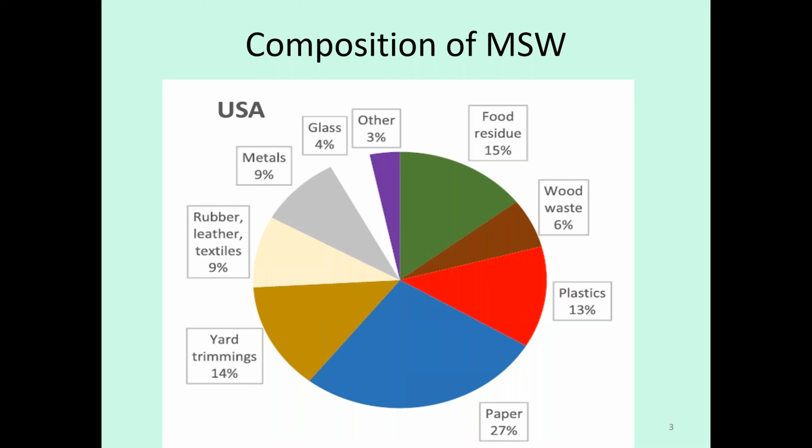Let us see the country-wise composition of waste for a few countries, including India. In the USA, the major portion is paper, which is biodegradable. Along with that, the second is yard trimming, food residue, plastics, rubber, leather waste. Wooden, metallic, glass, and other wastes are less than 10%.

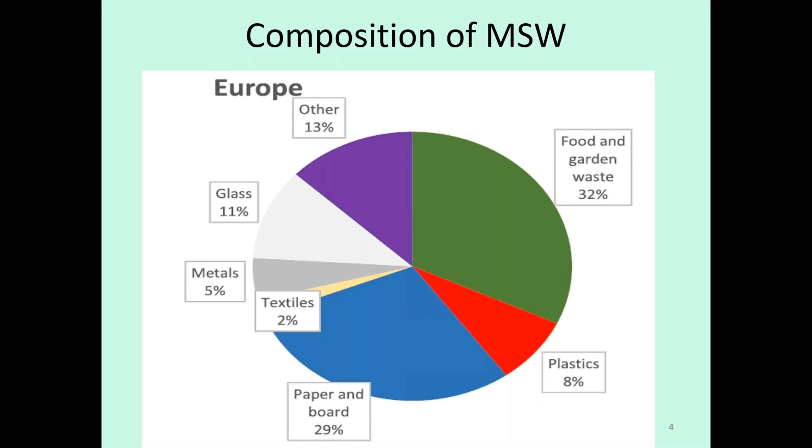Now coming to Europe, which is again a developed region. Their waste pattern is paper and board 29%. Food and garden waste has the highest percentage at 32%. Then glass, plastic, metals, textiles, and others.

Now coming to India. We generate 1.33 lakh metric ton of waste per day, out of which 0.91 lakh, meaning 68%, is collected, and waste littered is 32%, or 0.42 lakh metric ton per day.

The treatment as of now is: municipal solid waste treated is only 19%, whereas 49% is crude dumping, or landfilling. The type of waste we generate is 47% biodegradable, paper waste is 8%, rubber 9%, and there is a good amount of inerts which are non-biodegradable at 25%.

So India requires 1240 hectares of additional land per year to handle this untreated solid waste. Also, the calorific value of this waste varies from 800 to 1100 kilocalories, and the moisture content is 40 to 50%.

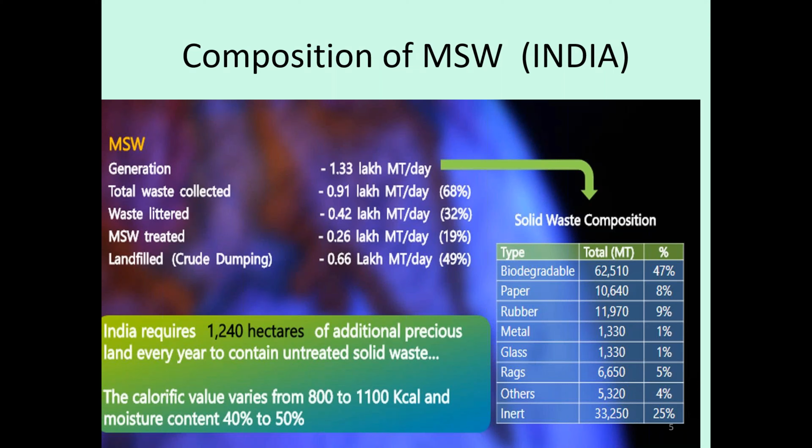Now, waste is not called waste these days, it is a wealth. As we have seen, there is a private company in California, San Francisco, who is managing a huge quantity of waste and generating a huge profit by recycling as well as by producing manure.

So India has potential by this year: waste to energy can produce 700 megawatts, and waste to compost can produce 54 lakh metric ton.

This report is from the Task Force on Waste to Energy constituted under the chairmanship of Dr. K. Kasturi Rangan. I have taken the data from that.

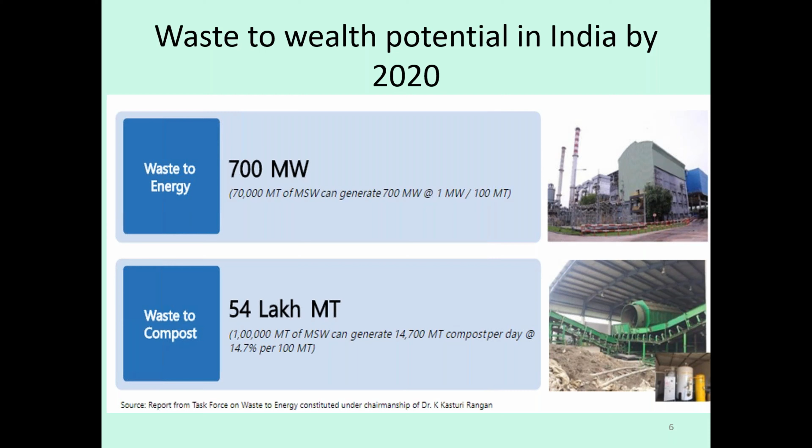Now, how to manage the waste? There are mainly three ways. First is recycling. That is the best method if we can do this. We have seen that San Francisco is recycling 76% of its waste.

Second part is energy recovery. If we cannot recycle the waste, we must recover the energy from it. My today's presentation is based on this second part of managing waste. And obviously the last one is landfilling, which is the least preferred and is often avoided.

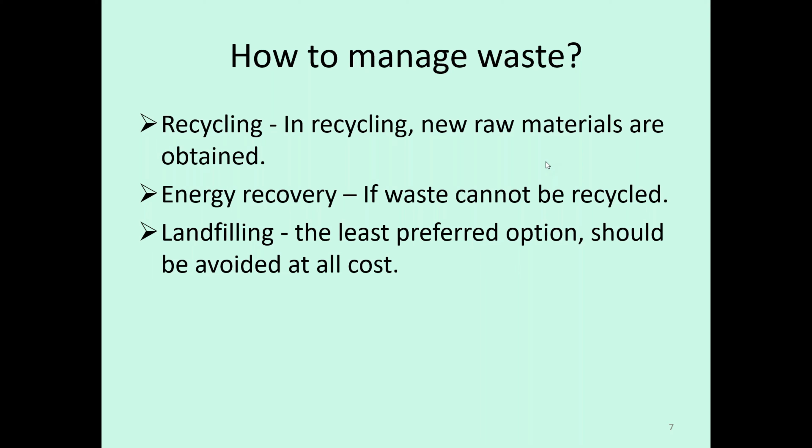So before coming to my topic, which is pyrolysis, let me introduce another common terminology, which is incineration, or simply burning.

Most countries right now are using this technology, incineration, to handle non-recyclable waste. In this process, a properly designed furnace at suitable temperature and pressure is used to burn the solid waste. It reduces the volume to a greater extent, up to a level of say 3 to 5% only, and the burning temperature achieved is in the range of 1200 to 1500 degrees centigrade. So it sterilizes as well as stabilizes the waste with reduction in volume.

But the only problem with this process is that we generate a lot of harmful gases which must be treated before sending the fumes to the atmosphere. So many countries, including USA and other European countries, Singapore, are generating a lot of energy from waste using the incineration process. The remaining 3 to 5% ash they dump in barren islands.

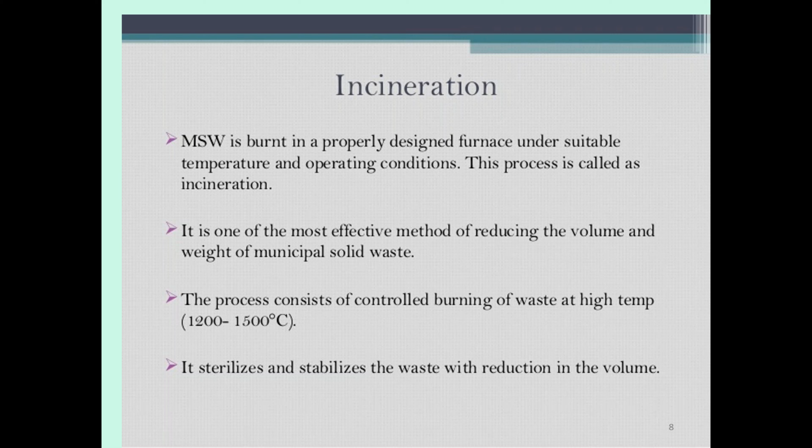So now, how is pyrolysis different from incineration? We all know that pyrolysis is the thermal decomposition of organic material at higher temperature in the absence of oxygen. Now this is the main difference: incineration was done in presence of oxygen, whereas pyrolysis is done in absence of oxygen.

Pyrolysis generates a combination of solid, liquid, and gaseous products in different proportions, which depends on the heating temperature and heating rate.

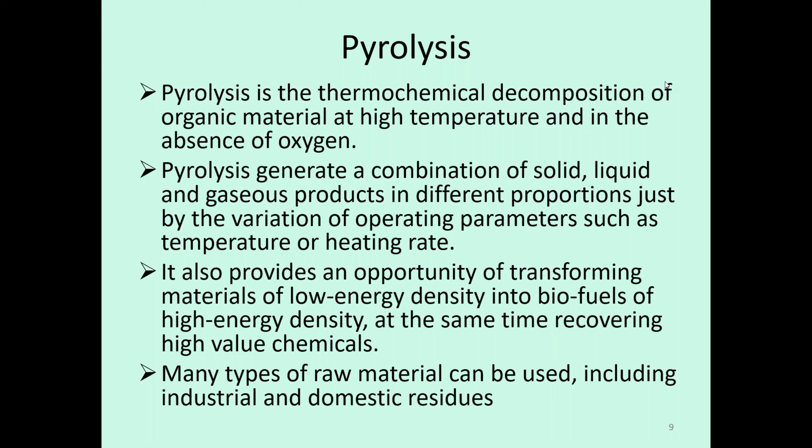It also provides an opportunity of transforming materials of low energy density into biofuels of high energy density, which can be used further, as we will see in later slides. Another advantage is we can use many types of raw materials, including industrial as well as domestic residues.

Types of pyrolysis: we categorize it as fast, catalytic fast, intermediate, slow, and vacuum. These are based on the speed of pyrolysis. Another type is carbonization, gasification, and torrefaction.

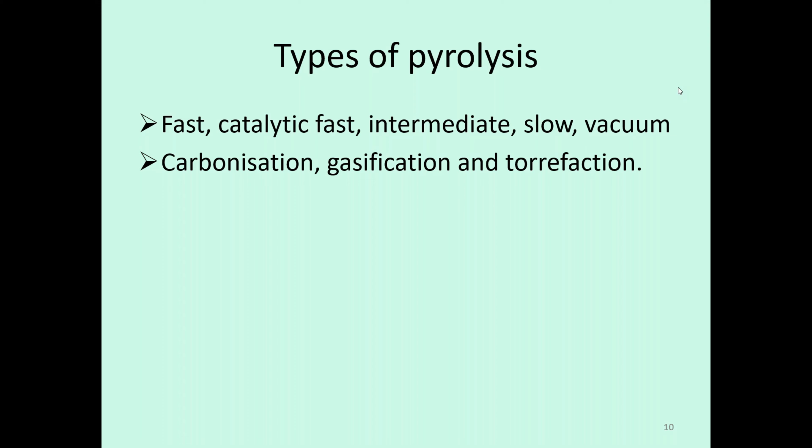Now, how the product from various types of pyrolysis processes varies. In the fast process, the gaseous products are very low, whereas most of the organics remain present. Similarly, in gasification, we get maximum gases, very little char and water. In intermediate pyrolysis, we get almost everything equally. So depending on what type of product we require, we select fast, intermediate, or slow.

Generally, for municipal waste, slow pyrolysis or slow carbonization is used.

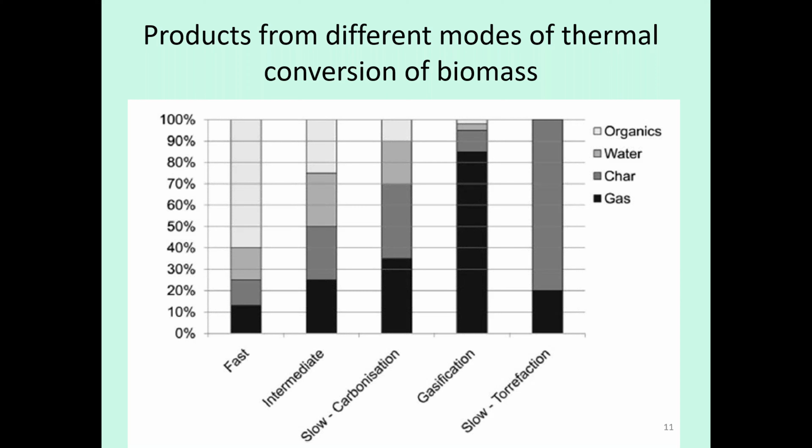Now, types of pyrolysis reactors. Most common is the fixed bed type, which we call a batch reactor, in which we feed one batch of solids, treat it, and after recovery of various products, close it for another batch. Fluidized bed reactors are continuous type reactors. Spouted bed reactors are also continuous, along with rotary kiln, microwave assisted, and solar reactors.

The last two, microwave assisted and solar reactors, are the advanced ones. A lot of research is being conducted these days. No one has commercialized these types of reactors yet, but there is a lot of scope for them because of their advantages.

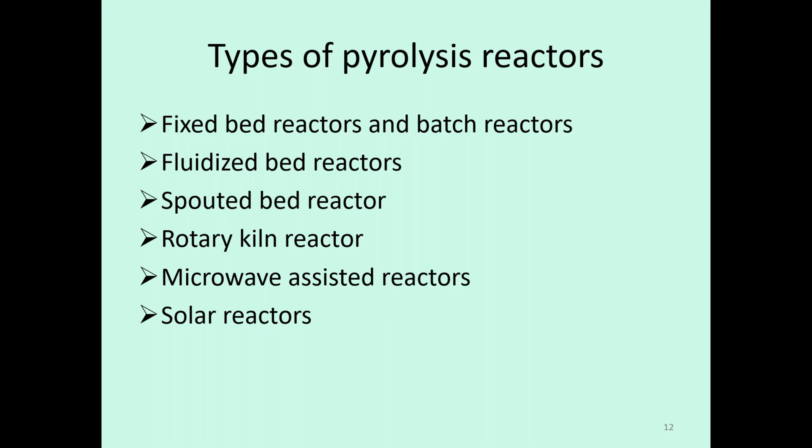I will explain one by one a brief about different types of reactors. Fixed bed reactor, or batch reactor, is the simplest available, on lab scale and even pilot plant scale. Feedstock is placed in the reactor as a fixed bed, generally made of stainless steel, and heated externally, mostly by electric heating.

The disadvantage is that a lot of energy is required to process one batch, along with a very long residence time. It is also difficult to remove the char produced during the process. It is rarely used at industrial scale because of its cost ineffectiveness, but for research and characterization of products at lab or pilot scale, these are mostly used.

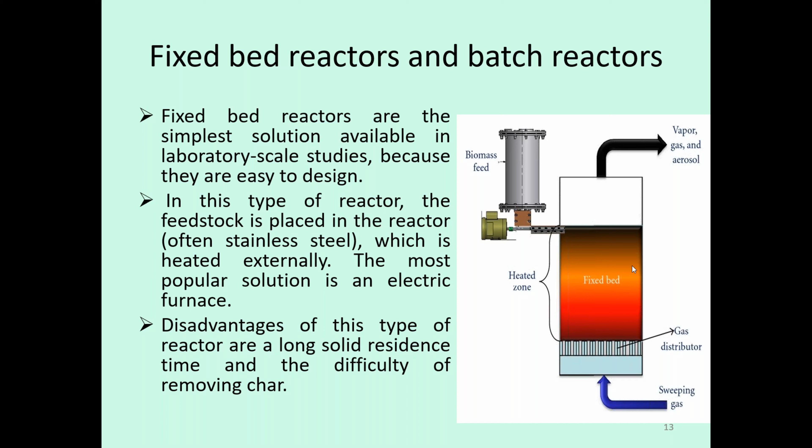Fluidized bed reactors typically behave as fast pyrolysis reactors, where the solid waste is fluidized. Although it is very difficult to fluidize the solid waste, the particle size of the waste should be very small, but this is one of the continuous type reactors.

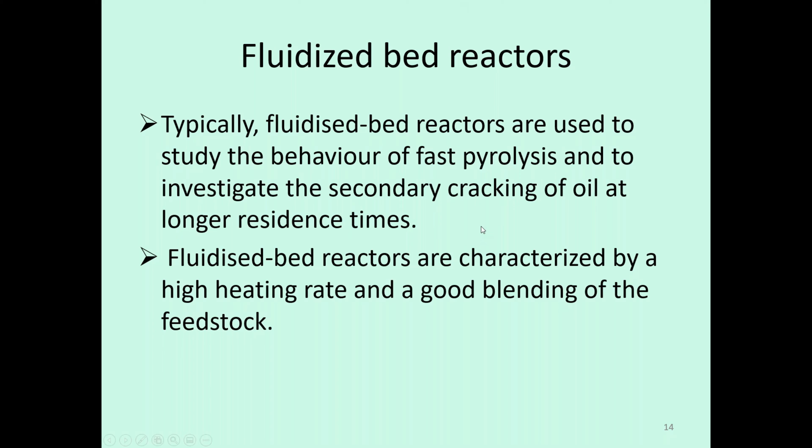It is characterized by a high heating rate and good blending of feedstock. So we get a good blend of all types of feedstocks that can be fed into this type of reactor. This is how the fluidized bed reactor works.

Initially, in the blue portion, this is the feeding system where screw feeders are present, including a hopper, where waste is fed. The yellowish green portion is the pyrolysis system, the fluidized pyrolysis reactor. Through these screws, the waste is fed into this reactor.

From the bottom, there is an air compartment. If required, we can supply air, but because pyrolysis is done in absence of air, we generally don't use this.

After that, we get different types of products which are separated in downstream processing. This blue portion is the cooling system where circulating pumps and condensers are present. We get different products which can be used; the gas produced from the system can be used for heating purposes. This is the gas purification and recycle system, so basically the heating is done by the gas produced from the reactor itself.

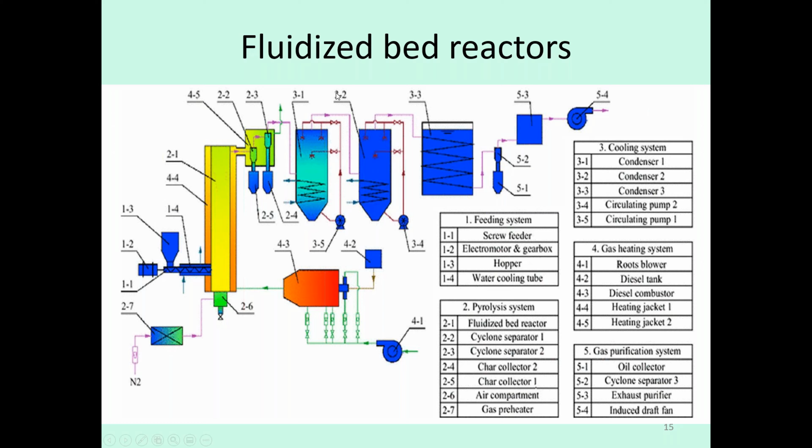The main aim of such a system is to utilize maximum energy within the system itself and generate various valuable products: solid, liquid, as well as gaseous fuels from the reactors.

As I already told, municipal solid waste cannot be treated by fluidized bed reactors because municipal solid waste generally has a high particle size. In this type of reactor, the particle size should be very small so it can be easily fluidized by air; we use nitrogen instead of air for fluidization.

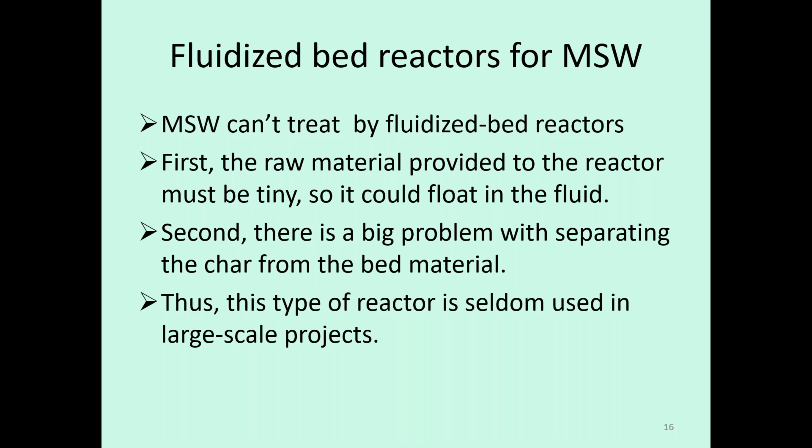Second is the problem of separating char from the bed material, because this char is generally sticky and difficult to remove in a continuous system. So this type of reactor is rarely used in large scale projects, but fluidized bed reactors are very useful for several other catalytic reactions. Spouted bed reactors...

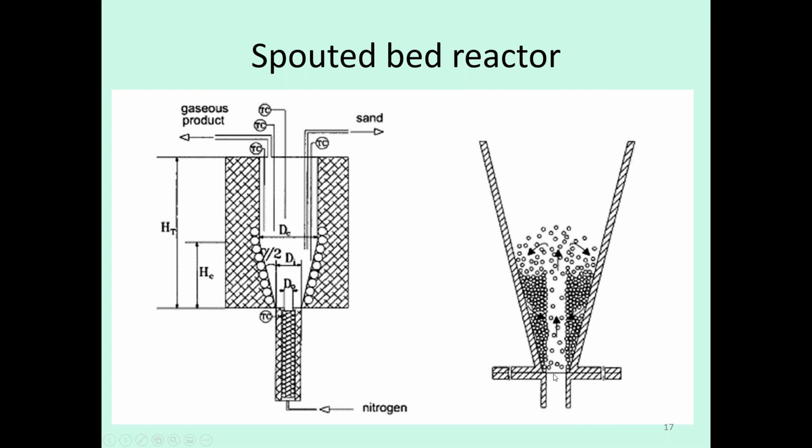Now in this we fed the nitrogen from the bottom, and it is a conical shape which we can use. This is a very advantageous, simple type of reactor in which feeding is automatic through gravity. Nitrogen is fed from the bottom, which mixes as well as segregates the particles. So we are getting a lot of advantages which I have mentioned.

This is suitable for handling particles of irregular size and textures, even sticky solids with various size distributions. This type of system has great versatility with regard to gas flow. We can even operate with a very short residence time, or a very high residence time, just by adjusting the gas flow.

So there is excellent movement of solids in the reactor, which consequently leads to higher heat transfer, increasing its efficiency. Moreover, the conical spouted bed reactor is appropriate for continuous operation. These are successfully employed, especially in the pyrolysis of a number of polymers, including polystyrene, polyethylene, etc.

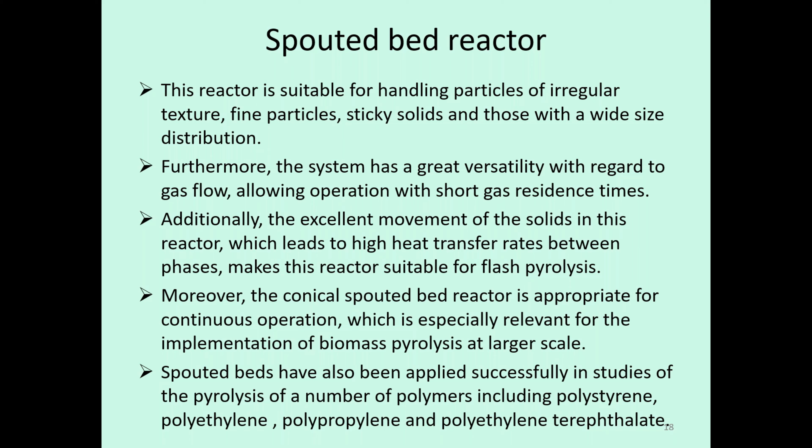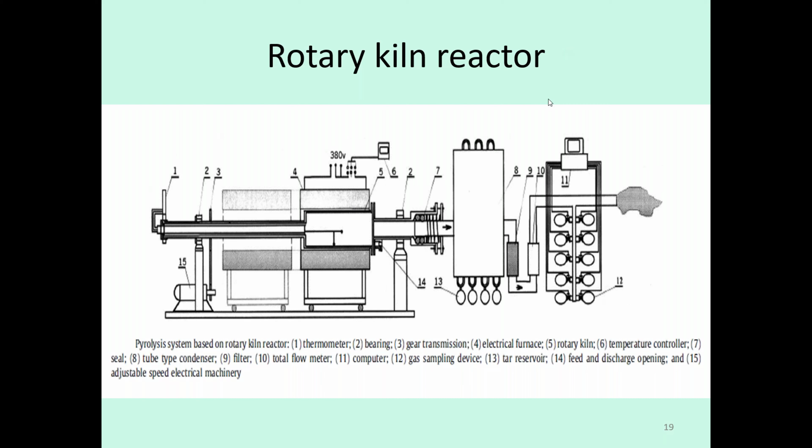In absence of air, the waste gets treated, and there is a temperature controller, and subsequently we have a separating system in which we cool down and separate the different particles of the different components of the waste. This is the most widely used system for pyrolysis of all types of waste. Generally these type of reactors are used in the slow pyrolysis of municipal solid waste.

Especially it was started in Germany, Japan. Solid waste of various shape, size, and heating value can be fed either in batch or continuous mode, so we have a lot of flexibility in this system. It also offers better heat transfer.

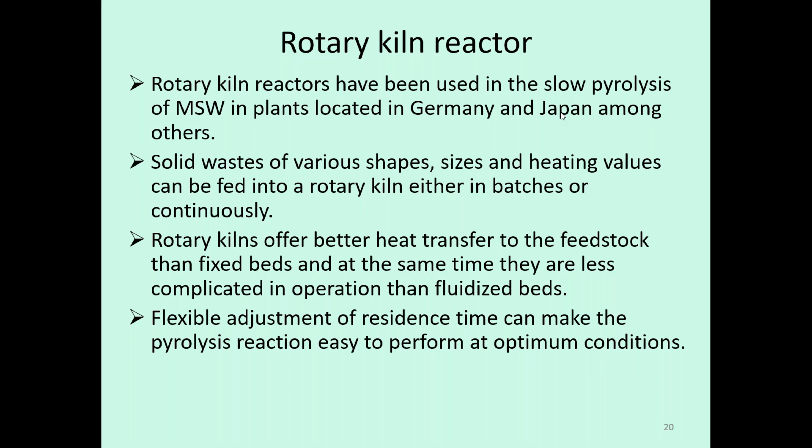Generally, this heat is given by electric heating. So we can easily adjust the residence time and pyrolysis reaction time to achieve optimum conditions as per our requirement.

...and optimize the condition, we can get gaseous fuels, pyrolysis oil which is the liquid fuel, as well as solid char. So from low temperature to high temperature, we are getting various components.

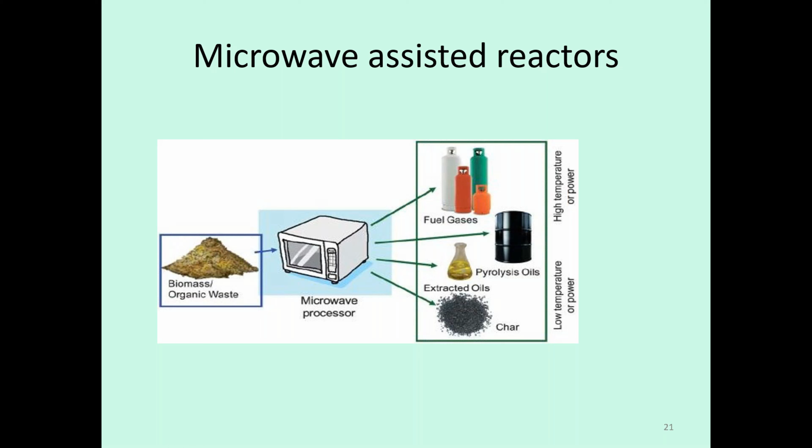If we are using high power of microwave, we get more of the fuel gases. If we use less microwave power, we get more charcoal. So we have to see what type of product we require.

Based on that, we can use high or low power in the microwave. This is how microwave compares versus conventional heating. Microwave is, as we all know, very rapid and efficient - heating is throughout the whole material simultaneously, as compared to thermal heating, which heats the fluid by convection and conduction.

So microwave heating is selective, because there is intense heating for polar substances and it is ineffective for non-polar substances. Because of time shortage, I will not explain what are polar or non-polar substances, but one thing is that water is a polar substance, and it gets heated very quickly using the microwave.

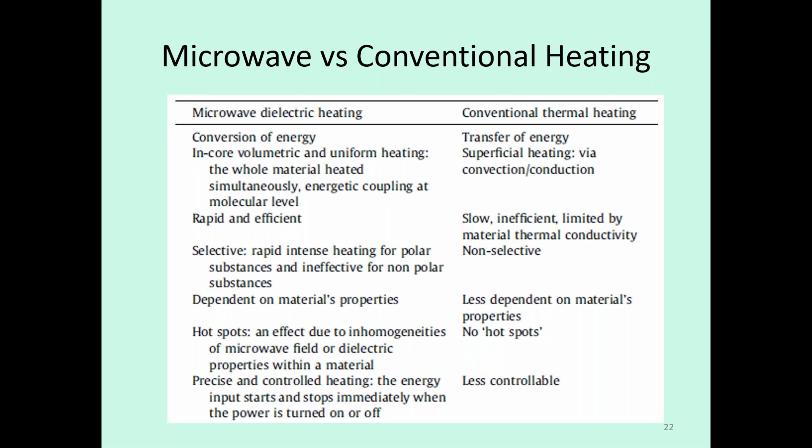So, based on the high advantages of microwave dielectric heating, these days a lot of research is being done on the use of microwave heating as compared to conventional heating for pyrolysis.

Solar radiations are now used to economize our pyrolysis. Solar radiations are used to achieve the temperature which is required for pyrolysis, in the range of say 500 degrees centigrade. The advantage of this type of process is that there is no operational cost, only initial capital investment is required.

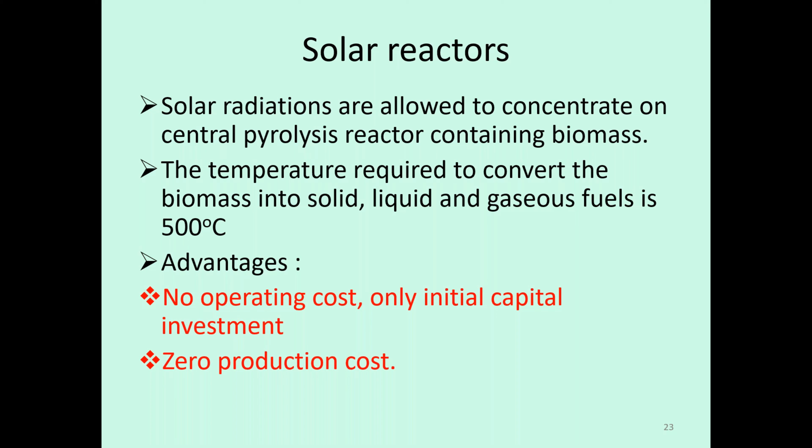So there is almost zero production cost. We will see in the next slide how we can use solar energy for pyrolysis using the sun's rays.

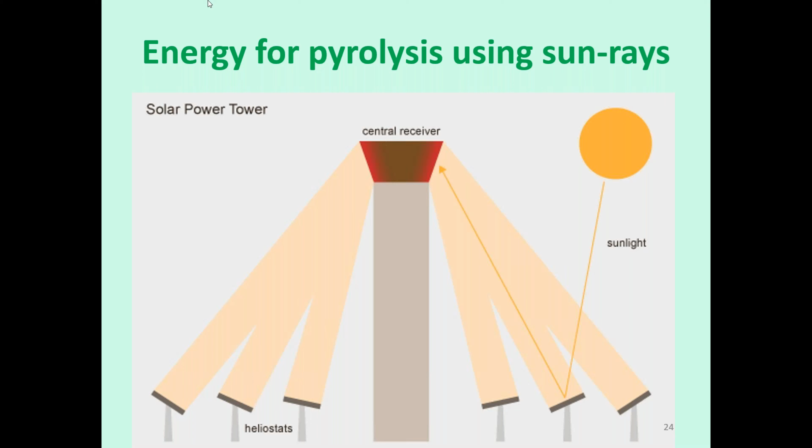So this is a very cost-effective process, but still a lot of research is being done on how to optimize such processes and maximize the efficiency of pyrolysis. So for those in research, they can work on this. In this, we have simultaneous production of solid, liquid and gaseous products. We pyrolyze the biomass using sun.

More things, sir. Your mic is on, I think. Okay sir, fine, I'll check it.

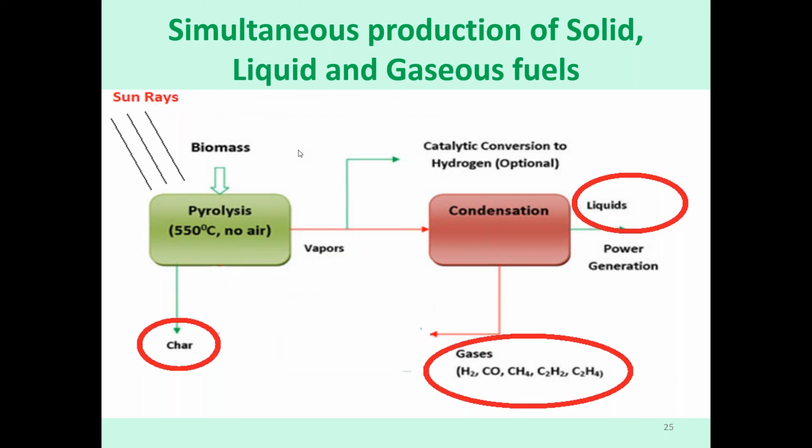So we are using the sun rays to pyrolyze to produce a solid biomass, which is char. To get the vapors, we condense these to get two products: gaseous fuels, as well as liquid fuels, which can be used as biofuels. So this is a latest technique to pyrolyze the waste using sun rays, in which we are getting various components of the fuels.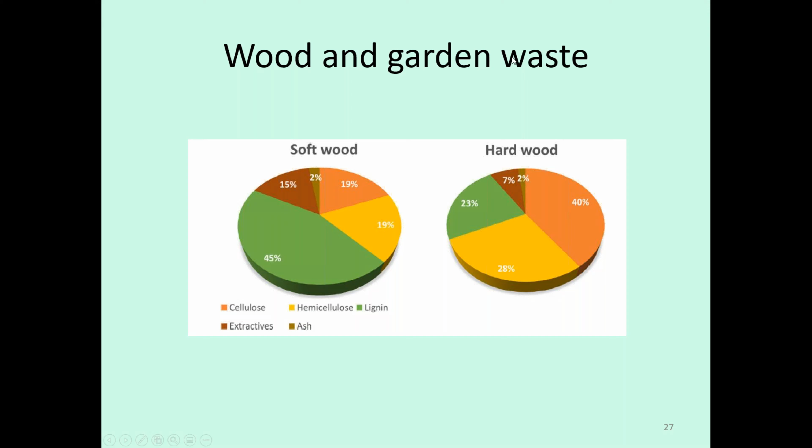So type of waste - I will just quickly go through the type of waste which is treated by pyrolysis. What we can treat is wood and garden waste. Wood can be classified into two types: softwood, which has more lignin - 45% lignin and 19% hemicellulose and cellulose - whereas hardwood has 40% cellulose, 28% hemicellulose, and lignin quantity is less, around 23%. So we can use both types of wood in pyrolysis.

So these are the works done by various researchers. I have compiled what temperature, which type of reactor they have used, and what is the composition of the three types of products: gas, liquid, and solid. At lower temperature, obviously we get more solid product and lesser gaseous product. So temperature plays a very important role, as well as the type of wood, for pyrolysis.

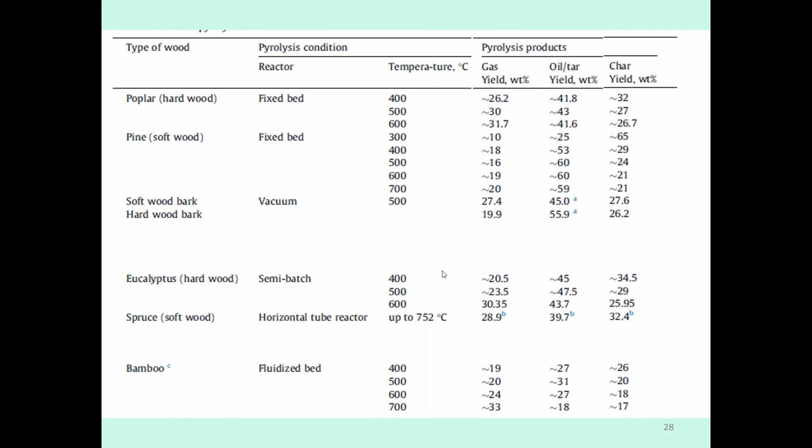Second type, which is a main composition, is waste paper. We classify this waste paper into three types: industrial use for filtering, packaging, electrical use, and wrapping; cultural use papers used in printing, writing, newspaper, currency; and a third type, food packaging for wrappers, food wrappers, tea bags, coffee cups, filters, etc.

So there is a very large amount of consumption of paper. It is a major component of the combustible fraction of solid waste, accounting for say 1/3 of typical municipal waste. Due to this reason, many advanced countries, including US, Denmark, Singapore, use incineration as part of energy generation even today, because they have a lot of paper or wooden waste in their municipal waste.

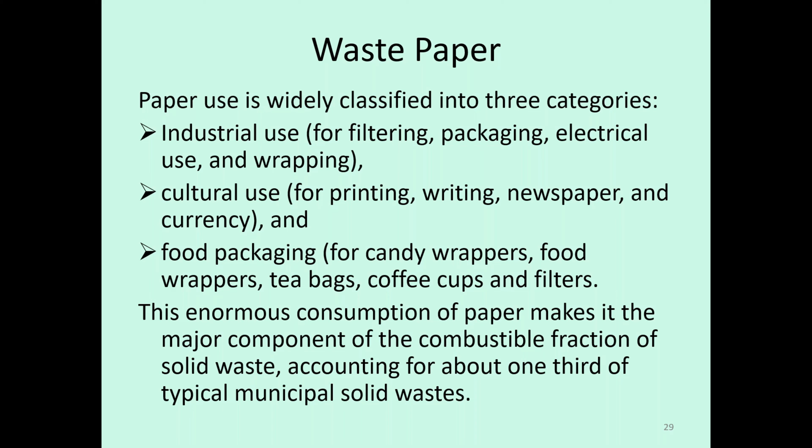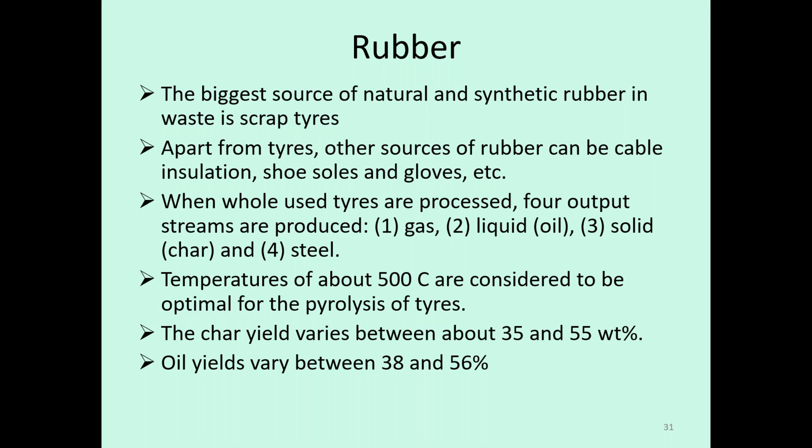Another type of waste is rubber - natural as well as synthetic rubber is the scrap tires. Apart from tires, we use insulation, shoe soles, gloves. When a whole used tire is processed, 4 streams are produced: gas, liquid, solid, and since the tire contains steel, we also get steel as a component. A temperature of 500 degrees centigrade is almost optimal for pyrolysis of tires, and the char yield is maximum, from 35 to 55%, with the oil yield in the same range.

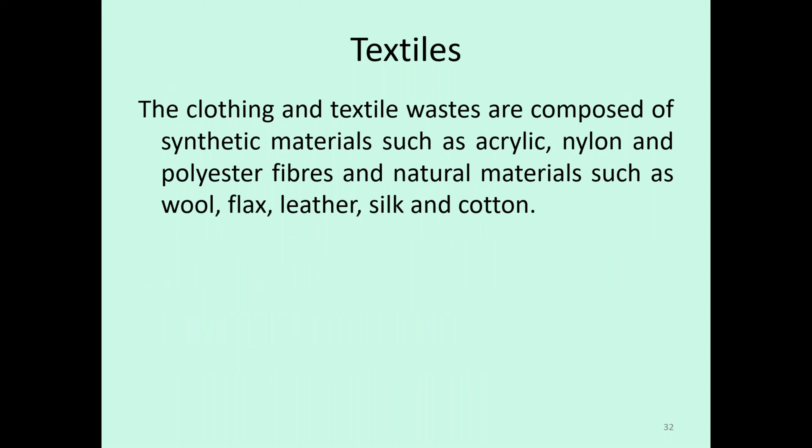Textile clothing and waste are synthetic materials like acrylic, nylon, polyester. These constitute another type of waste. In textile waste also, we are getting mostly solid or liquid pyrolytic products. We get gas yield only at higher temperatures.

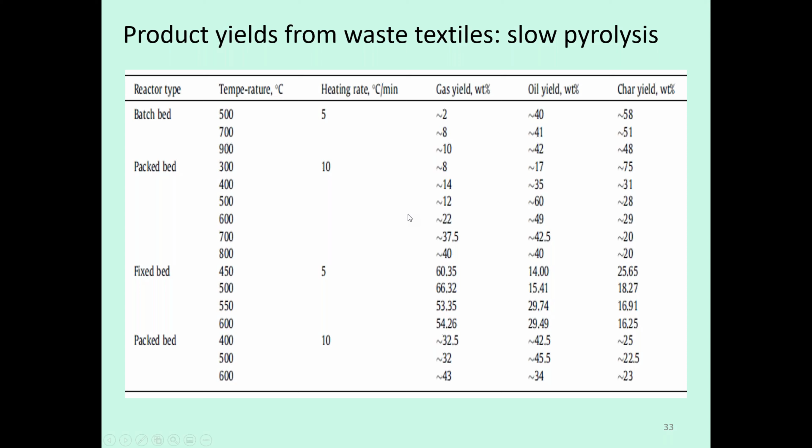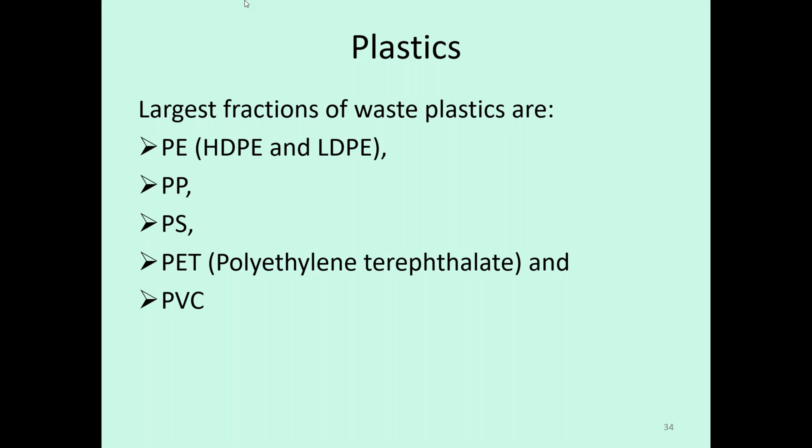Another largest fraction in the waste is plastics. Plastics include high density and low density plastics - polypropylene, polystyrene, polyethylene terephthalate, PVC, polyvinyl chloride. All these types of plastics generate different types of products. For example, if you see at higher temperatures, HDPE - though this is a comparison for HDPE and LDPE.

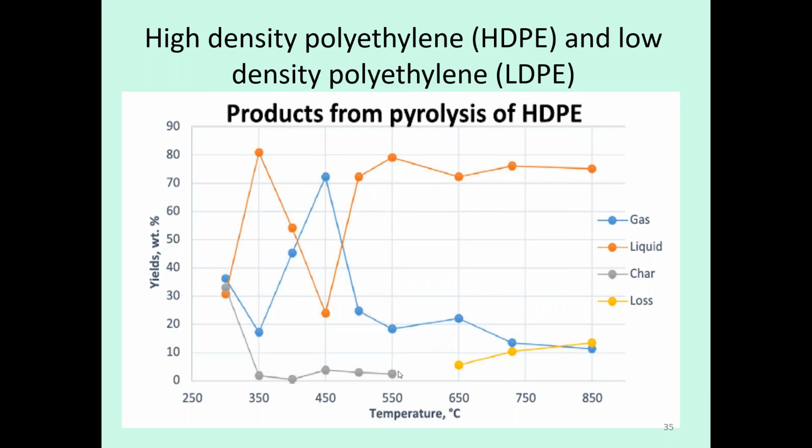So we are getting most of the liquid products at higher temperatures. But again, at the higher temperature, there is another disadvantage that the losses start increasing. Though the char quantity is almost negligible, the losses are again on the higher side.

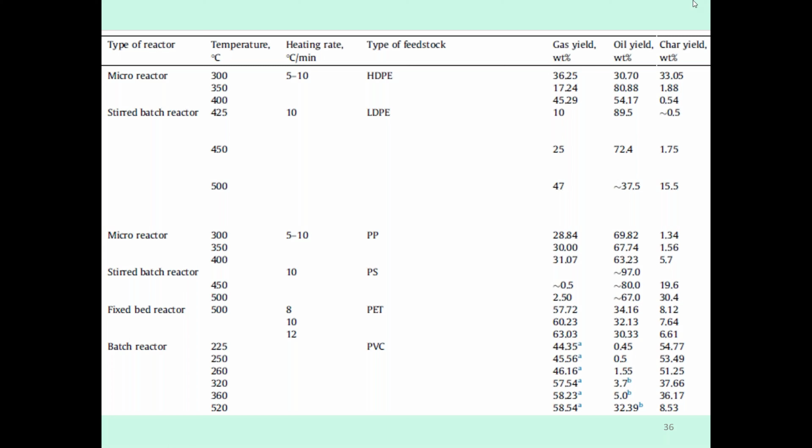So this is the type of reactor used, with what type of plastic feedstock we are using, and a comparison between all the different processes. For plastics, one advantage is that we are producing very less quantity of charcoal, especially for LDPE, polypropylene, and only for PVC are we getting a huge quantity of solid residue. Otherwise, we are getting mostly gaseous or liquid fuel from the pyrolysis of plastics.

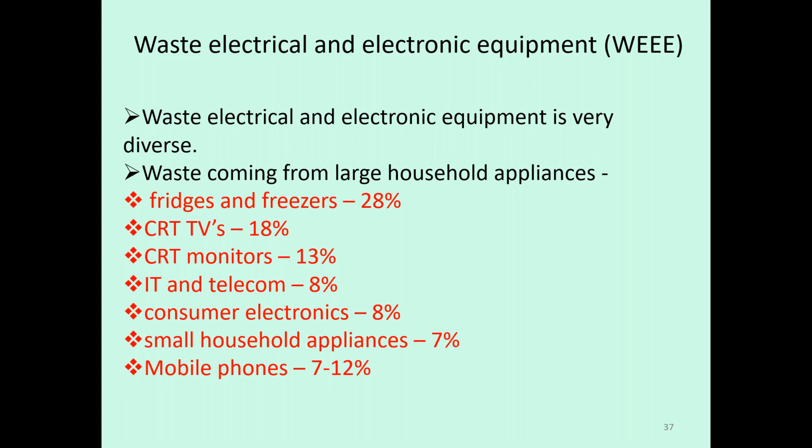Another upcoming type of waste is waste electrical and electronic equipment. These days, with the usage of more electronic goods, this type of waste is increasing. From household items, fridges and freezers constitute 28%, televisions and CRT monitors constitute 31%, IT and telecom 8%, and mobile phones around 7 to 12% of the electrical waste.

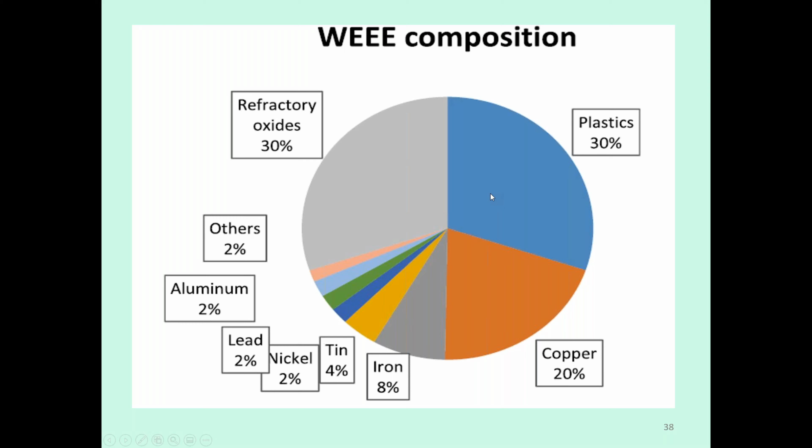So electrical waste is composed of about 30% plastic as well as 30% refractory oxides. In the metal fraction, we have the maximum percentage of copper, then iron, then small fractions of aluminum, lead, nickel, tin, and others. When we pyrolyze this, we get different products based again on temperature. At higher temperature, we get very less solid, and our gas fraction keeps increasing as we use higher temperature.

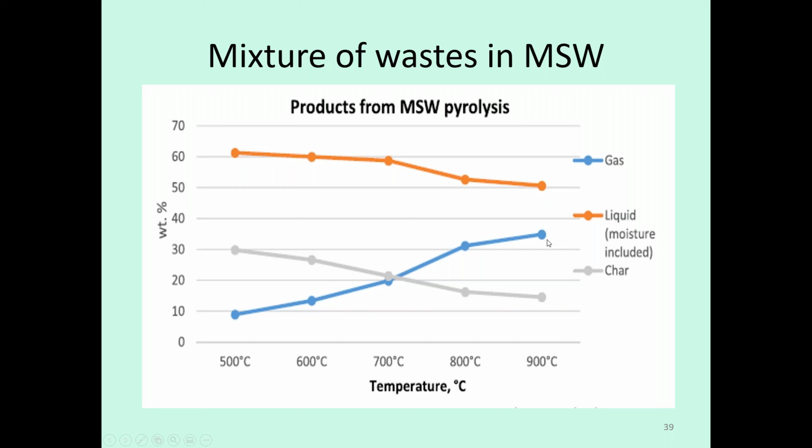So how can we use these products produced from the pyrolysis? I will take a few more minutes to sum up my presentation. First is the most useful one, the gas. The composition of gas depends on the pyrolysis temperature and feedstock. So slow pyrolysis, if we use wood, garden waste, or food residue at less than 400 degrees centigrade, produces a small amount of gas rich in carbon dioxide, carbon monoxide, or light hydrocarbons.

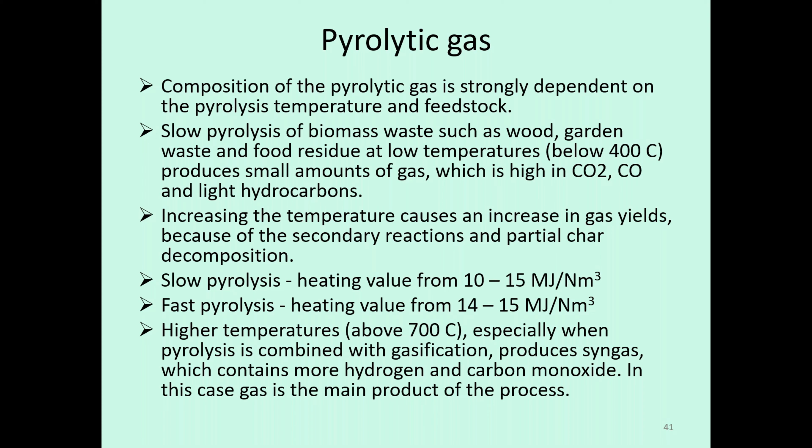But increasing the temperature increases the gas yield because of secondary reactions. The heating value of gas produced from slow and fast pyrolysis is in the range of 10 to 15 megajoules per normal cubic meter. At higher temperatures above 700 degrees centigrade, when pyrolysis is combined with gasification, it produces synthesis gas, which contains more hydrogen and carbon monoxide. This type of gas is highly useful as a fuel.

Oil is used in the same way as biofuels, and it has more opportunities for use than gas, because we are already using liquid fuels in most industrial applications. They can be used for production of electricity, direct heating or burning, synthesis gas, or chemicals. Temperature between 500 to 600 degrees provides a good yield of oil when biomass is processed, with a heating value of 15 to 20 megajoules per kg.

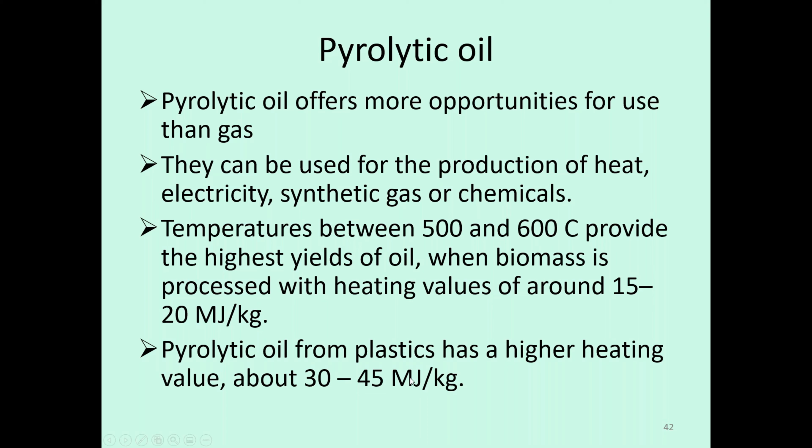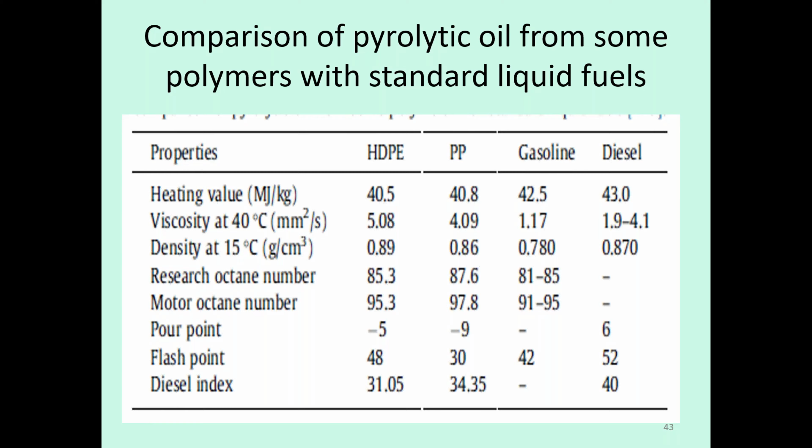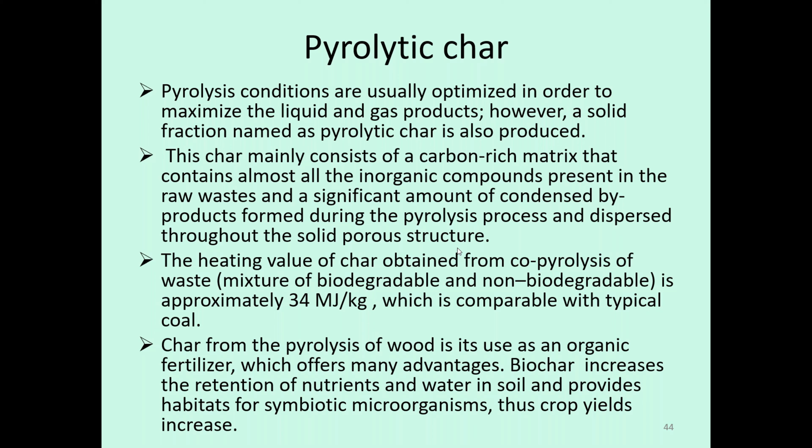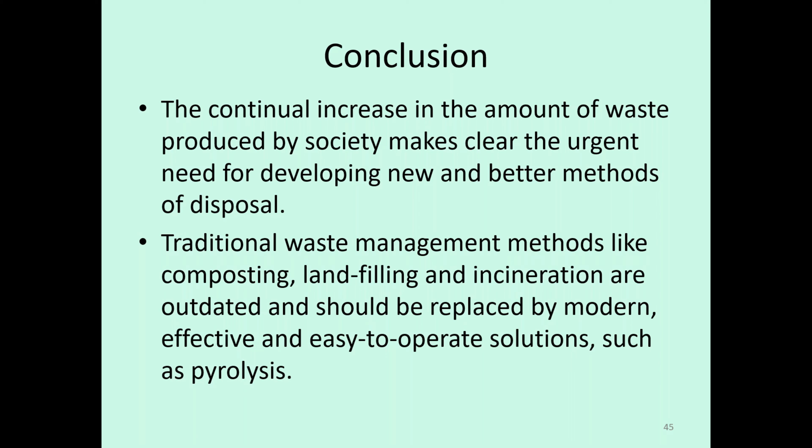So now I'm concluding that the continual increase in the amount of waste produced by society makes clear the urgent need for developing new and better methods of disposal. Traditional waste management methods like composting, landfilling, and incineration are now outdated. Developed countries started using these methods 40 years back, so now they should be replaced by modern and effective eco-friendly processes like pyrolysis. We have a lot of future scope in managing this waste: improving the energy efficiency of the processes we have studied, improving product quality, eliminating undue emissions from the pyrolysis process, minimizing pre-treatment of waste, and developing technologies that allow efficient processing of mixed waste streams, since waste is generally mixed. We have to develop certain technologies which can treat mixed waste.

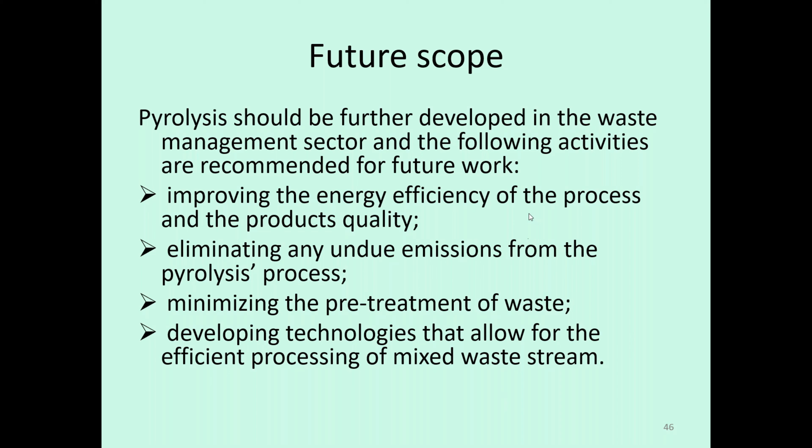So with this, I thank you. Any questions? I think I have finished well in time. So we have some time for discussion.

Sir, now you can also switch on your camera for discussion. I think there must not be an issue, if you wish to.